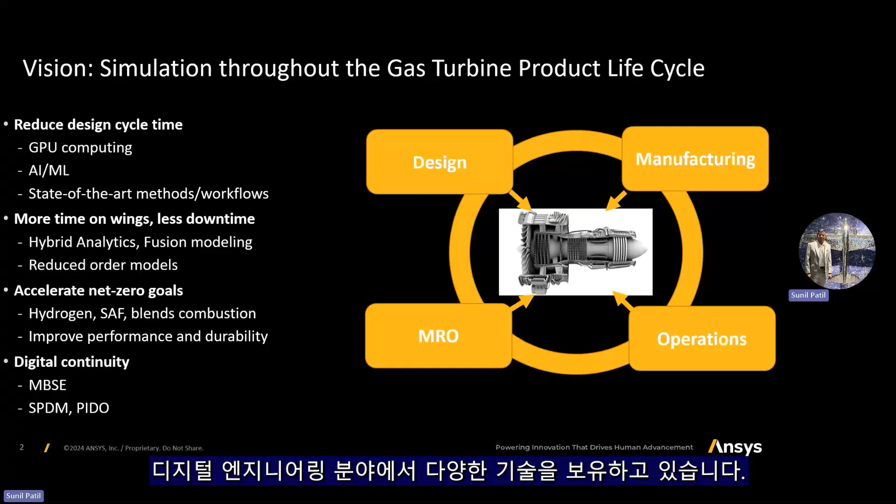As far as the gas turbine technology focus areas are concerned, we focus on various important components such as fans, but also on modules such as compressor, combustor, turbines, and also subsystems and the overall system, ensuring that key technology initiatives such as increasing efficiency, improving durability, reducing weight are addressed while also meeting new sustainability or net zero targets.

All of this is done while leveraging AI/ML and GPU-based computations as a method to really accelerate the cycle time and hence help our customers achieve faster time to market.

As I mentioned earlier, we provide solutions for individual components such as fan and things like blade flutter, bird strike, icing, to multi-stage aero unsteady combustion, modal analysis, rotor dynamic analysis, structural integrity analysis.

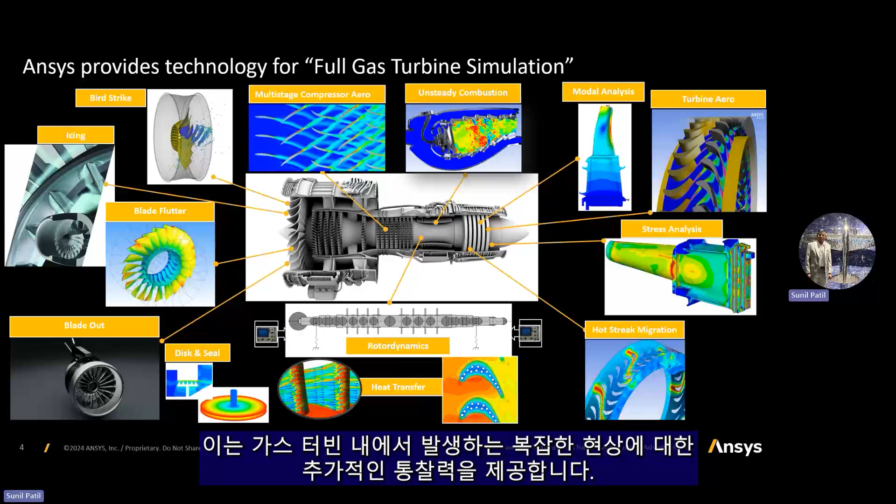One of the key differentiators from the Ansys side is you can also look at the full gas turbine end to end in a single calculation, and we have done that multiple times - in a single calculation you can go from the inlet to exhaust, and that provides additional insights into the complex phenomena happening within the gas turbines.

Now I'll briefly talk about the key pillars of our innovation strategy, which are also the important pillars for our gas turbine strategy I mentioned earlier. On the far left, you would notice our continuous focus on core physics, numerical methods, and models.

We continue to focus on high performance computing. Over the years we focused on CPU-based computations, but we also continue to focus now on coming up with native GPU-based solvers, and also looking further in the future to leverage technologies like quantum computing and see how it can benefit simulations.

AI/ML has been another focus area for us, and we are leveraging that for software acceleration and overall accelerating the solution time and reducing the product design lifecycle time.

We also want to ensure that our products can be run equally easily on the cloud platform, just as they can be run easily on the edge or on the local workstation.

And as I mentioned earlier, we have several technologies in the digital field, which are clubbed here in this intelligent engineering pillar, such as MBSE, the simulation process and data management, digital twins, mission engineering, and so on.

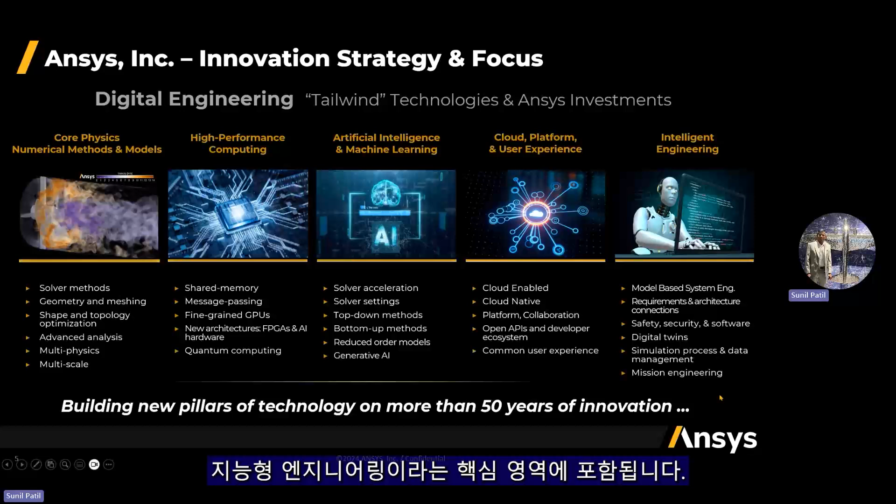Now with that background, let me deep dive into some of the key aspects of our gas turbine solution. We have a significant focus, especially on the CFD side, for native GPU computations.

Just to provide a little background, if you look at this chart at the bottom, you would notice that even the CPU-based computation, we have made enhancements over the past more than decade to make the calculations on CPU hardware fast.

But we introduced a native GPU solver 2 years ago, and you can see a significant increase in speed up, such as a high-end GPU card like H100 being about 10 times faster than running on 100 CPU cores.

Our overall strategy of leveraging GPUs natively is really providing a faster turnaround time. It is also providing much lower energy consumption to get a solution, and it is providing overall cost savings, including hardware cost savings.

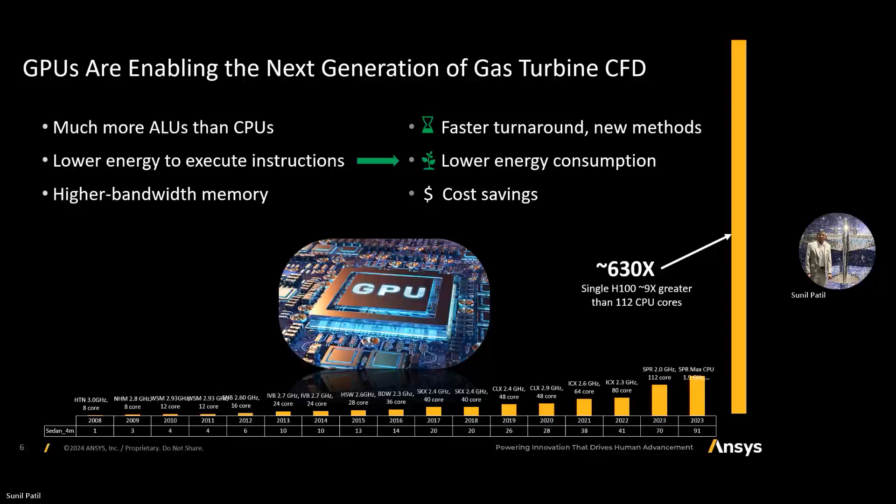As I mentioned, we introduced this native GPU solver for CFD in 2022, and we've had several releases since. By the latest release, we now have all the fundamental capabilities as well as some advanced capabilities which can address a lot of the complex problems for gas turbines, including gas turbine combustion, turbo machinery aspects, and many steady and unsteady phenomena happening inside the gas turbine. I'm going to cover some examples in the next few slides.

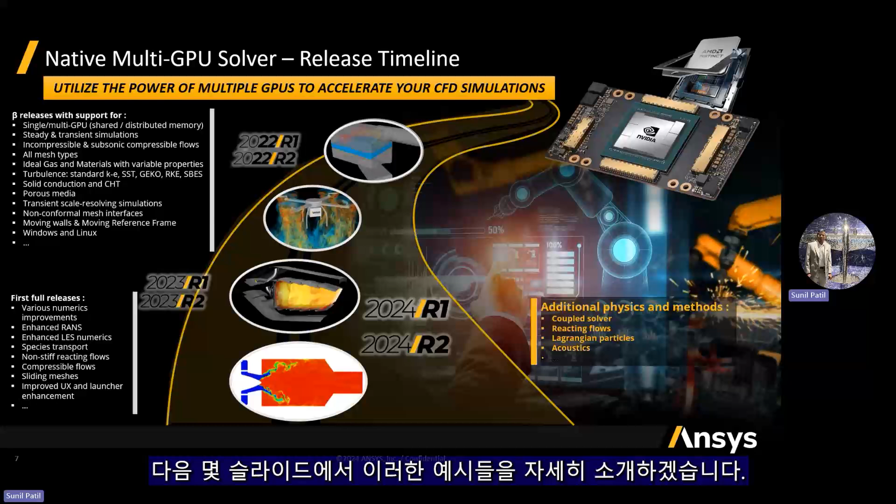I also wanted to mention that our GPU solver really scales well, and it can also leverage different hardware. In past couple of years, we published a lot of benchmarks on NVIDIA hardware. This year, 2024, we officially started supporting AMD hardware as well.

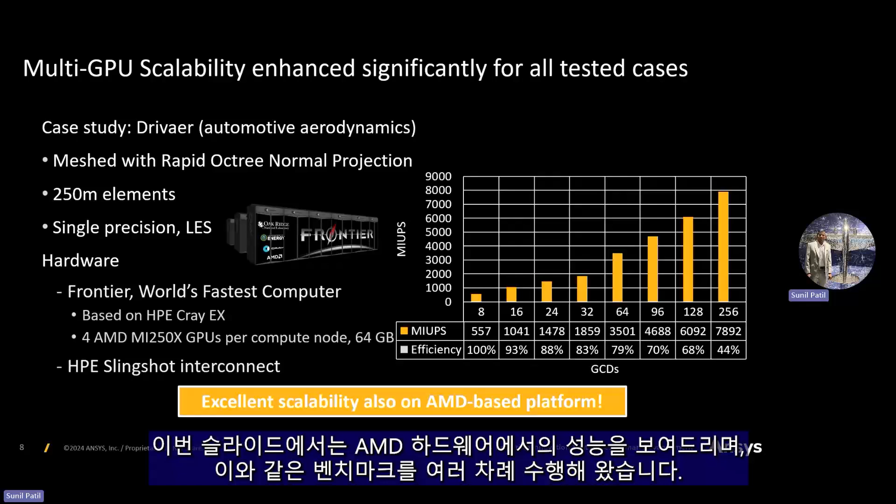Here you'll see one of the benchmarks on the 250 million LES case. You would notice that even on the AMD hardware, we do a really good performance scaling, parallel scaling. The key point I wanted to mention here is that the native GPU solver provides all those significant benefits, which I mentioned in the previous slide, on all different kinds of hardware. We've shown on NVIDIA, and here I'm showing on AMD, and we have done several such benchmarks. If there is interest, please let us know.

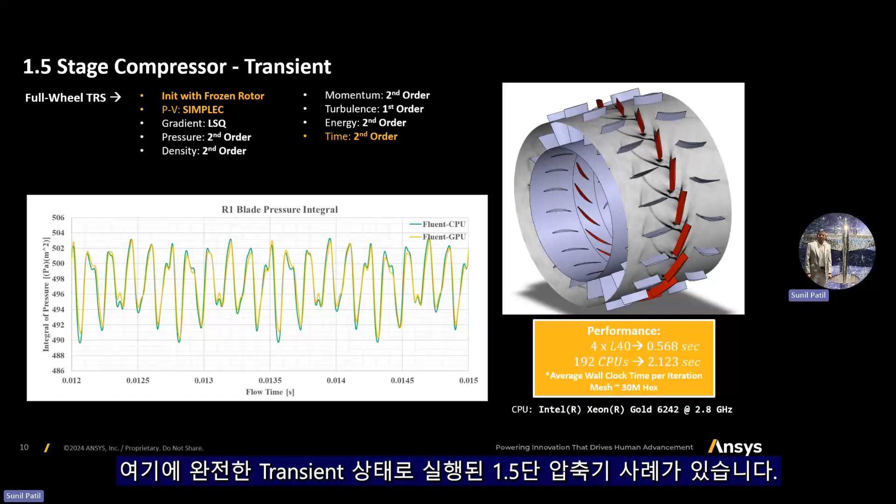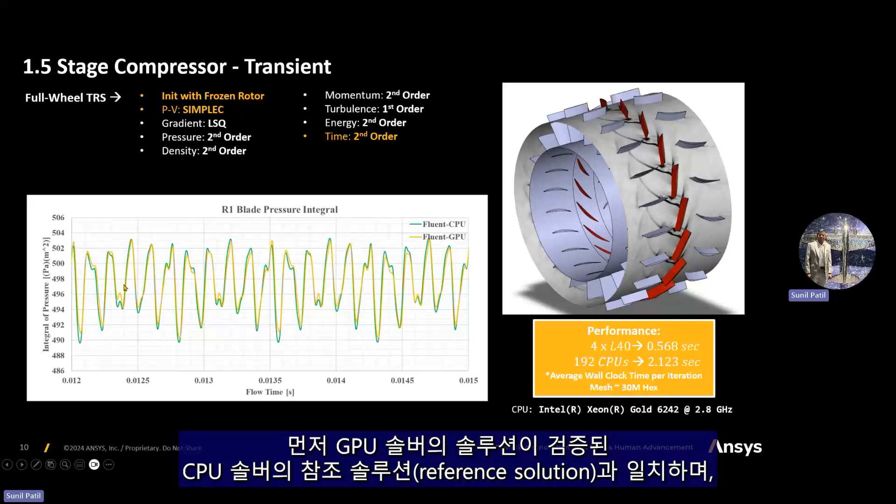Also cover a few of the turbo machinery examples here. The first one is a 1.5 stage compressor, run fully transient, full wheel, and this is a transonic compressor. Here's some of the details on the way we ran this case. You would notice that the solution from the GPU solver matches with the reference solution from the validated CPU solver, and once we do that, we see a significant performance benefit by running on GPU.

Here, we actually use a lower-end GPU card, L40, and even on that card, just one quad L40 node, we are able to get a solution for this 1.5 stage full 360 unsteady sliding mesh case which was taking just about half a second for a given time step, which provides significant speed up compared to running on CPUs.

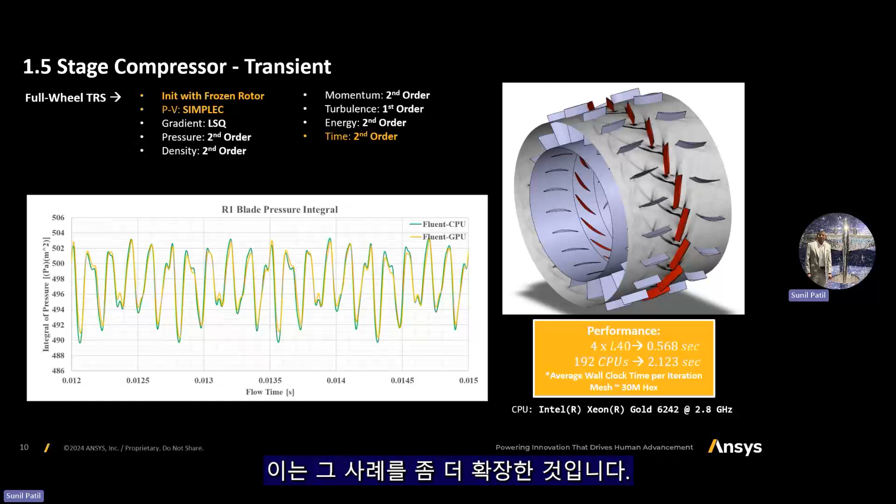This is a further extension of that - a 2.5 stage compressor. Again, you would notice that the solution from the GPU solver overlays on the CPU solution in terms of the signal, in terms of the frequency spectra. This is a little bit bigger case, about 100 million hex elements, and we can still run on a higher number of lower end GPU cards and still get a solution in less than a second per time step for this full wheel unsteady sliding mesh case.

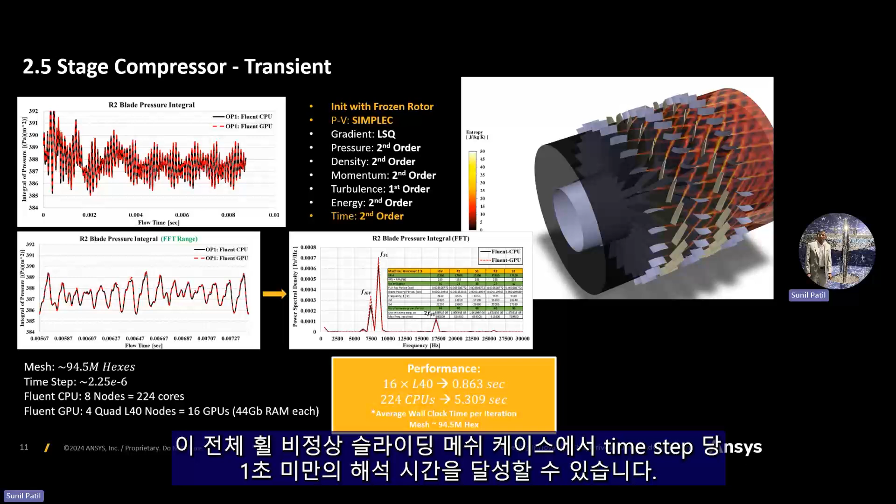This is just to highlight the strength of the fully native implementation to really take advantage of the GPU hardware. This is a 3.5 stage high pressure compressor of an aero engine. We ran this full multi-stage, full wheel - about 500 million total cell count. We ran this case with LES simulation, and we're able to run the full wheel or full revolution of this full multi-stage compressor in just about 8 hours on 3 GPU nodes. That provides the strength of native GPU solver to run these high fidelity transient calculations much more faster, making it much more practical, much more applicable in the regular production environment.

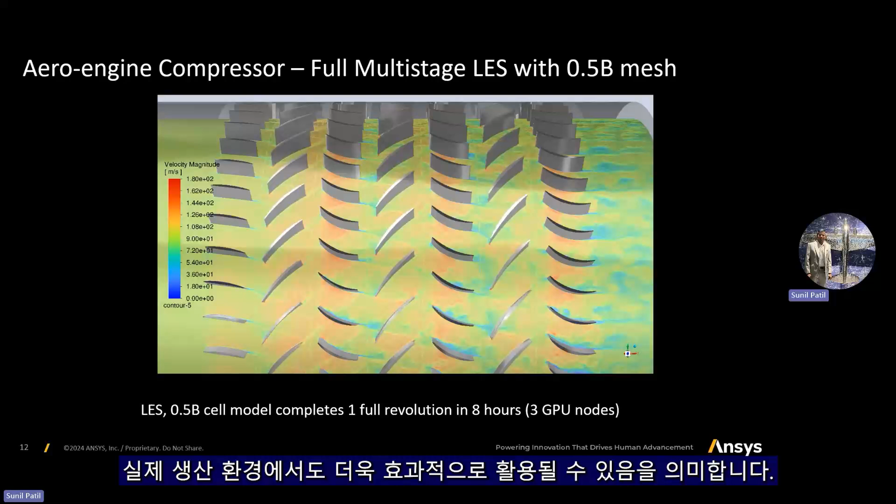Now I'll move on to the other important pillar, AI/ML, and with Ansys AI, we are providing a solution to really accelerate the design cycle time.

We have 3 different offerings under Ansys AI. Ansys GPT is basically a virtual assistant to Ansys products - a natural language, large language model assistant for documentation and training for your day-to-day usage of our software. Ansys AI Plus is primarily an AI add-on to different Ansys flagship solvers across our portfolio.

And Ansys SimAI is a machine learning platform for simulation across the physics. It's extremely fast and reliable, provides reliable physics predictions, which this AI model learns from your existing data and provides solutions to the new geometries in a matter of seconds.

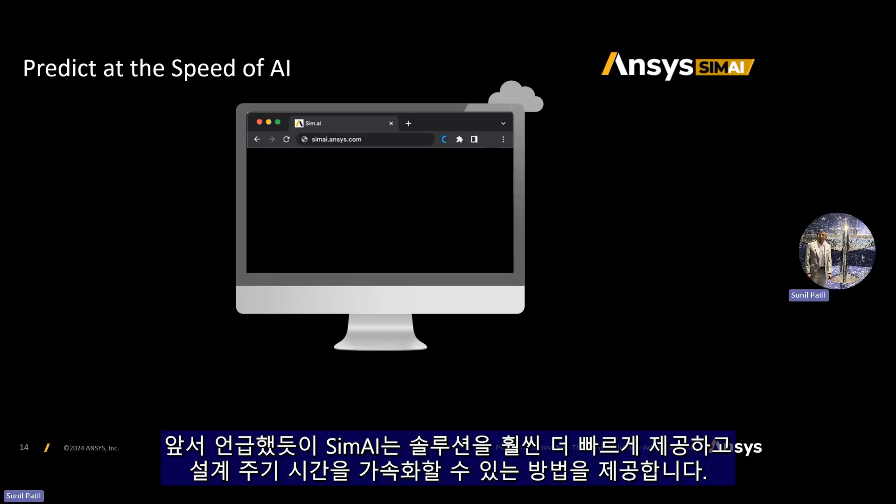So let me explain a little bit more details about SimAI, which, as I mentioned, really meant to provide the solution significantly faster and to really provide a way to substantially accelerate the cycle time. The idea is to use a machine learning platform to use the existing data.

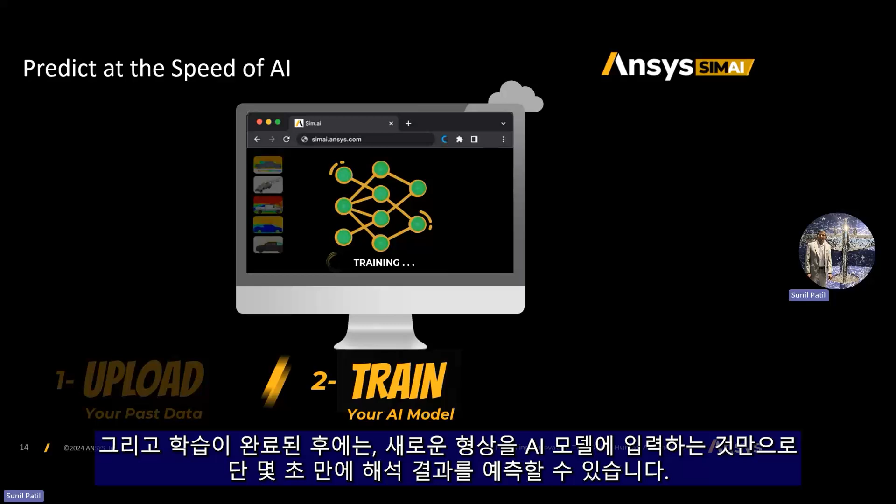So you can upload your past or newly generated data to this platform, and that data is used to train the AI model. And once this AI model is trained, then you can pass the new design, new geometry to this AI model, and it will start predicting in a matter of seconds.

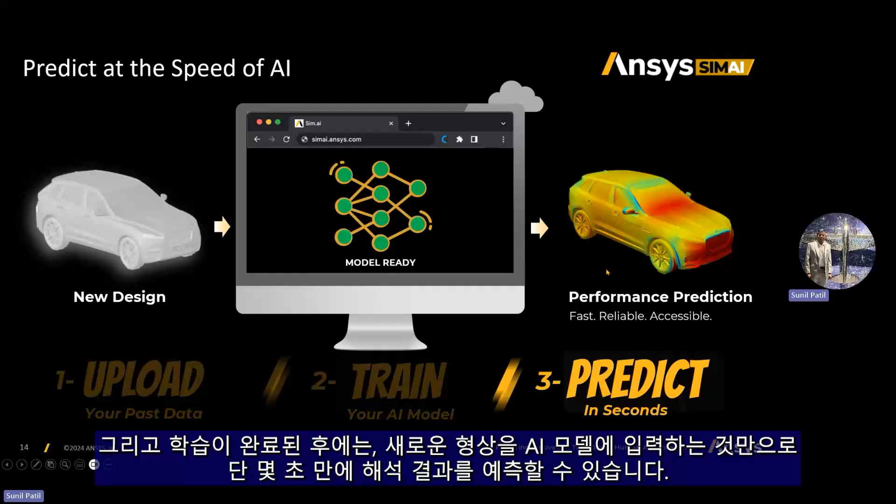So you can really unleash the power of AI for gas turbine design with Ansys SimAI. It's a cloud-based machine learning platform for simulation where you can train the AI without having to parameterize your geometry. You can predict the performance across the design changes.

You can leverage previously generated data to train the model. You can always generate new data and continuously keep on training the model, so it can continue to evolve.

And on top of that, Ansys SimAI is physics neutral. It's applicable to any physics such as fluids or aero, mechanical, electromagnetics, optics - applicable across all different industries such as aerospace, energy, automotive. It works with any 3D simulation data, whether it is Ansys generated data or generated by your in-house solver or third-party tools.

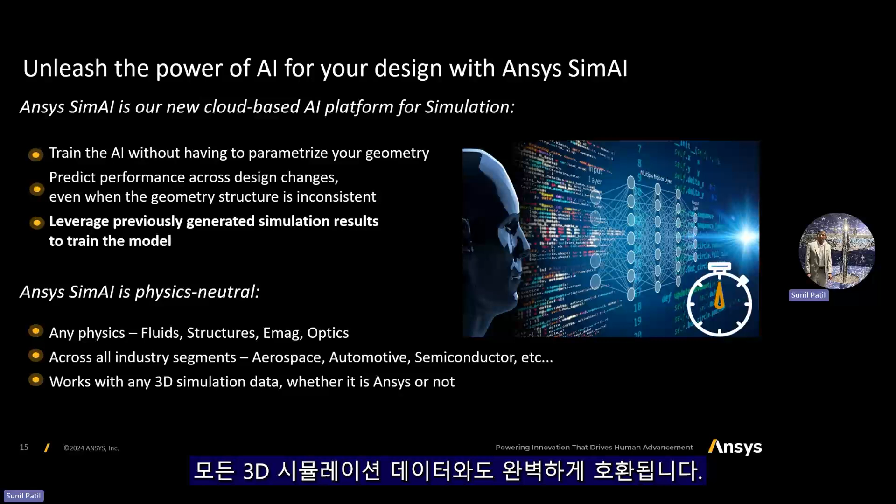And here I'm presenting the generative AI case using SimAI for the gas turbine compressor airfoil design. I'm presenting the airfoil design or the blade design because that's one of the areas where a lot of time is spent within the design phase for the gas turbines.

Here what we did was we used the existing aero as well as structural data. We used about 150 simulations - CFD and different modal structural simulations - to train the SimAI model. And once that SimAI model was trained,

we're providing new designs to the SimAI through a data generation engine, which generated different designs with the use of optiSLang, and it was able to predict the performance, predict the results for those new designs

in a matter of seconds. You can see this is one outcome for the CFD results and the predictions from SimAI - as you can see for the pressure distribution in this case, it matches very well if you actually run a CFD calculation for that new design.

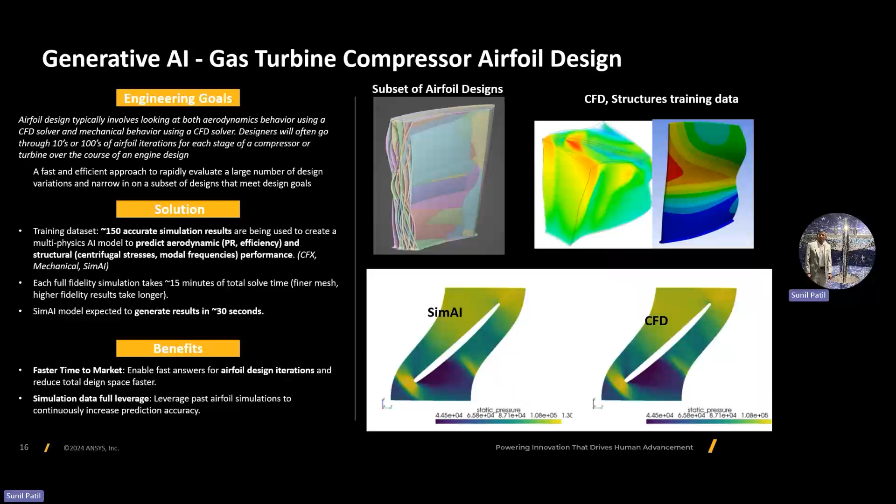So I talked quite a lot about SimAI, but also AI Plus, which is basically AI ML technologies embedded in our solver, also provides significant advantage for our gas turbine customers. I'll cover a couple of examples here, one on the aero side and one on the mechanical side.

This one is on the aero side or CFD side. The turbulence model optimizer in Ansys Fluent is part of the AI Plus offering. So the AI technology along with adjoint is used basically to calibrate the RANS-based GEKO turbulence model coefficients using the training data coming from high fidelity LES simulations.

And that really makes that two-equation GEKO turbulence model applicable to a similar class of problems with increased fidelity because it's leveraging the training from the high fidelity LES calculations. So such Turbulence Model Optimizer is now available as part of the AI Plus offering.

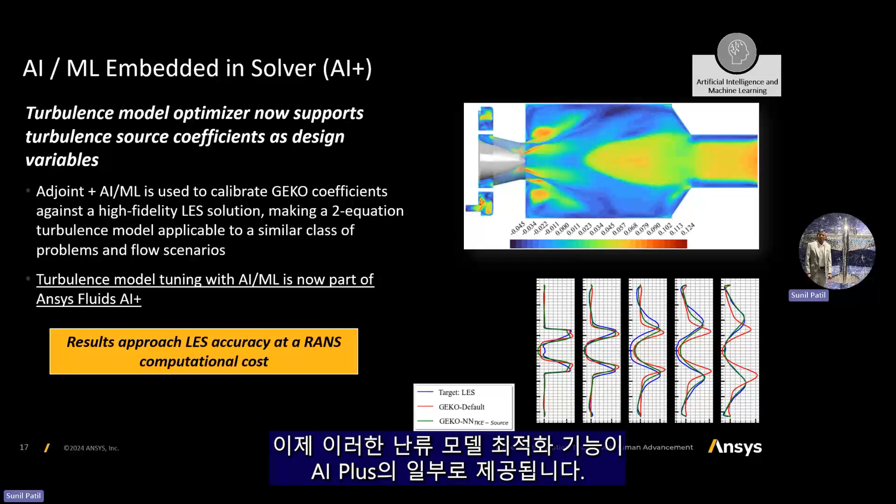On the mechanical side, we have been leveraging the solution statistics from millions of solver runs, anonymized, for resource prediction, including the solver choice, speed, memory, and the required disk space. And that is a powerful tool for our mechanical users for various classes of problems related to structural analysis for gas turbines.

Now I'll cover some specific areas related to turbomachinery or the blade rows. And I wanted to mention here that we continue to focus on CFX for the turbomachinery capabilities.

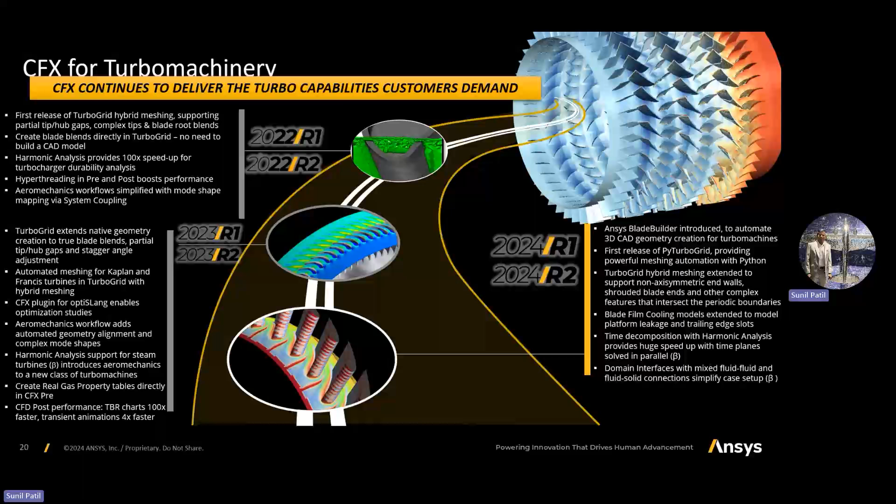In this chart, you will see that in the past couple of years, there were a lot of enhancements done in CFX, driven directly from our gas turbine customers, all the way from end-to-end workflows to detailed capabilities related to film cooling and the harmonic balance method. In fact, this year we are introducing a completely new paradigm for harmonic balance method with the time decomposition harmonic balance approach. Significant enhancements have been done in just the past couple of years, and we continue to deliver on the turbo capabilities based on customer demand.

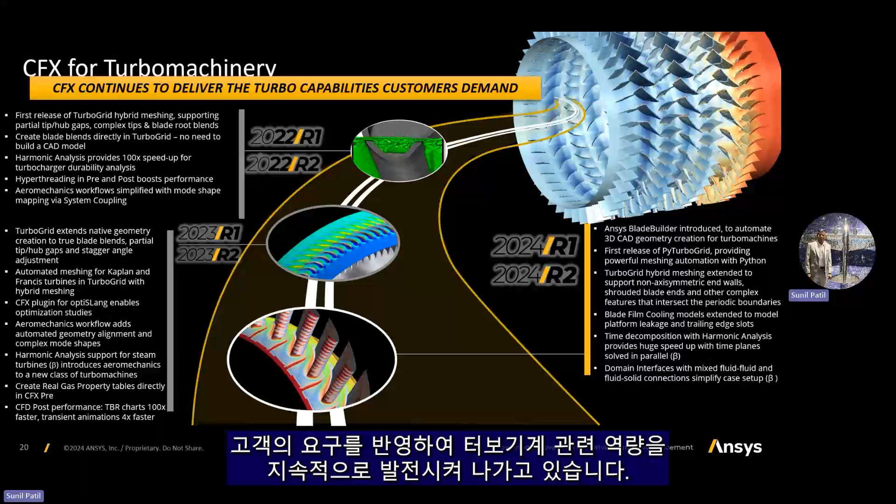Here you will also see some of the pre and post-processing focus associated with the overall turbomachinery solutions. We introduced the Blade Builder product, which provides a very streamlined workflow going from your mean line design or preliminary design to the blade row meshing to the CFD analysis.

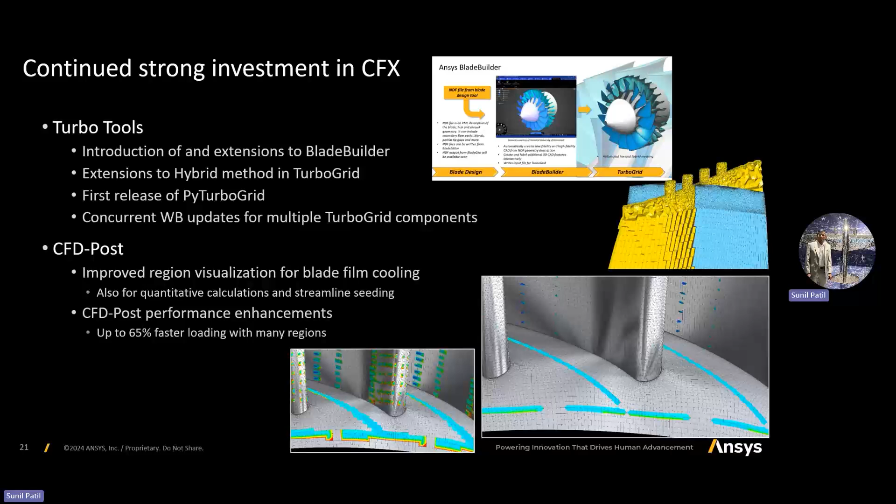We also introduced hybrid meshing in the past few releases and continue to build upon it in TurboGrid. This year, we also had the first release of PyTurboGrid, which allows a Pythonic framework to be used for automating the meshing as well as further enhancing overall capabilities, including the ability to do meshing for multiple components simultaneously, and also several post-processing enhancements related to visualizations or overall performance improvement to get results faster or post-process results faster.

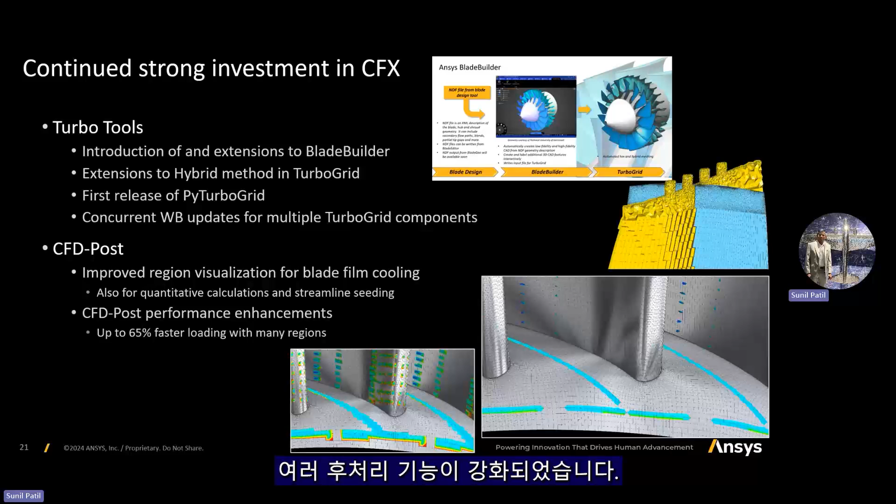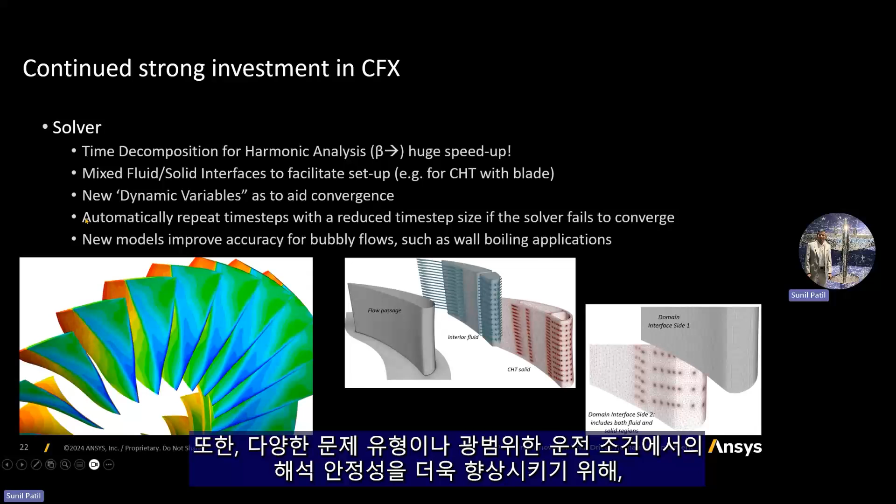On the CFX solver side, as I mentioned, this year we also introduced the first-of-a-kind time decomposition harmonic balance method, which provides an order of magnitude speed up. We also introduced mixed fluid-solid interfaces to facilitate better setup of high pressure turbine blades, and new dynamic variables to aid convergence. There are now capabilities to automatically repeat the time step with a reduced time step to improve overall robustness for various classes of problems or solutions across a wide range of operating conditions, and several new models to improve accuracy for flows like bubbly flows and wall boiling applications, and so on.

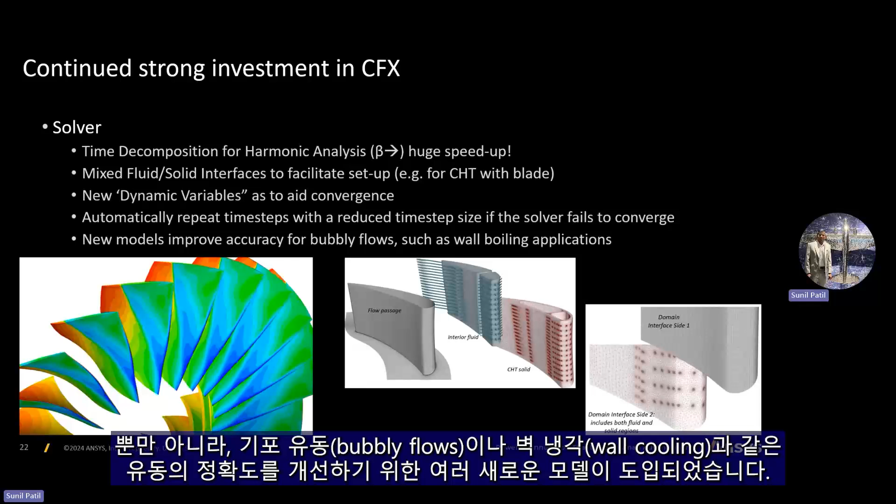I didn't mention about the Blade Builder, which is a new product, and it sits inside Ansys Discovery. It provides a modern 3D CAD environment for turbomachinery. The idea is you can bring in the data from your blade design tool, or just the data from your mean line design tool, and we can help you create the 3D CAD from that data.

We also help you further modify that data. For example, if you want to add complex details like a complex fillet, squealer tip, or partial tip gap, you can easily create those features and pass all that information automatically so that TurboGrid can create a hybrid mesh in a much more automated manner. So this Ansys Blade Builder provides a streamlined workflow going from mean line design to CFD, but it also provides this modern 3D CAD geometry environment for turbomachinery.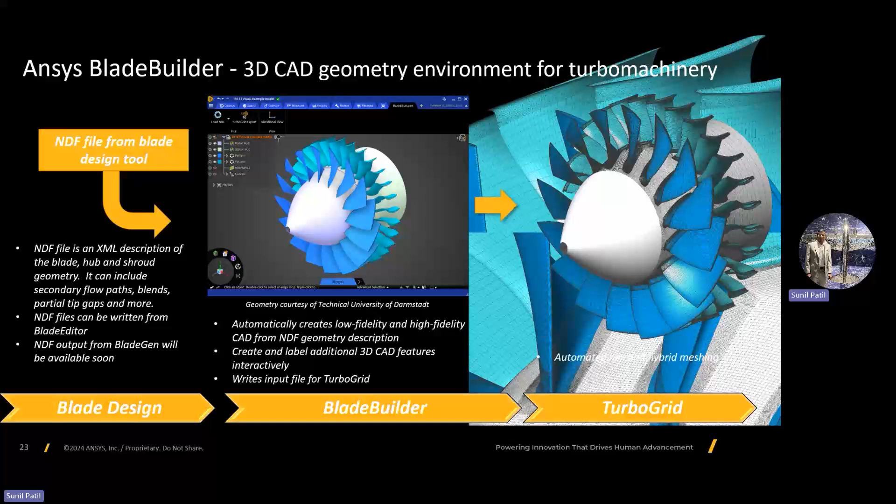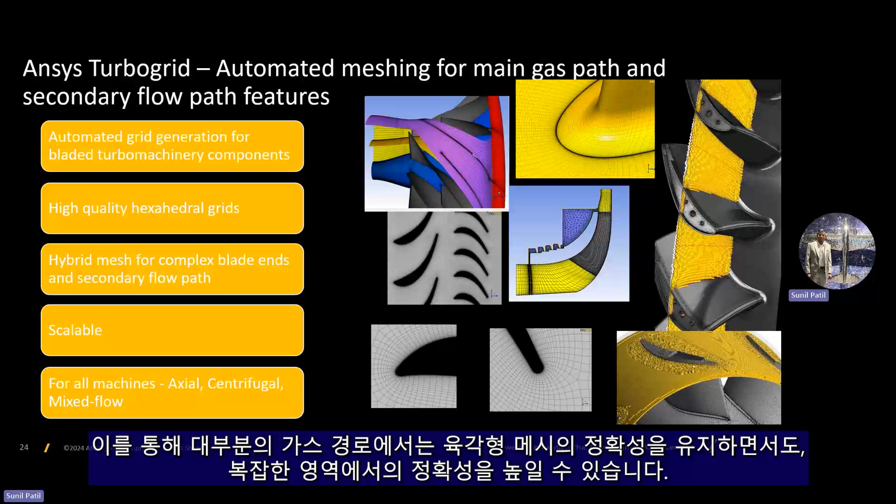I did mention about Ansys TurboGrid. Many of you might be familiar that it provides an automated way to create a hex mesh for the main gas path. But in the past 4 to 5 years, we introduced and built upon hybrid meshing, which can handle complex details such as squealer tips and secondary flow paths. The idea is to still have mostly hex mesh in the main gas path. Only in regions of complexity do you choose to have unstructured or tet mesh, but with a proper one-to-one connection to the main gas path hex mesh. That really provides the benefit of having overall low cell count, but still a really good quality mesh, which provides a much more accurate solution while maintaining the accuracy of mostly hex mesh in the main gas path.

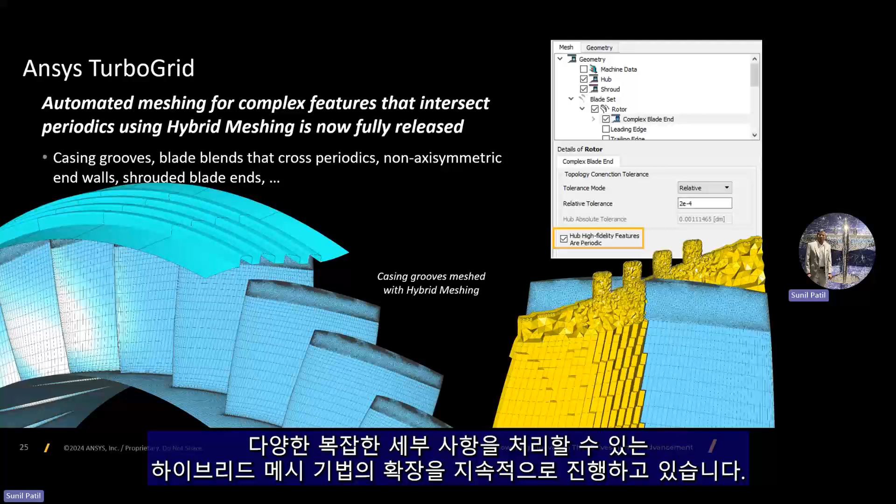As I mentioned, we continue to expand this hybrid meshing capability for various complex details such as casing grooves, complex blade ends, non-axisymmetric end walls, shrouded blade ends, and so on.

We also continue to provide solver APIs, ensuring that the broader Pythonic ecosystem can be leveraged for various different needs, whether it's customization of your workflows, automation, or adding additional capabilities. So we introduced PyFluent in 2022. We released PyTurboGrid this year, as I mentioned, which provides automation as well as the ability to do multi-stage meshing. We are also working on introducing PyCFX and PyRocky very soon.

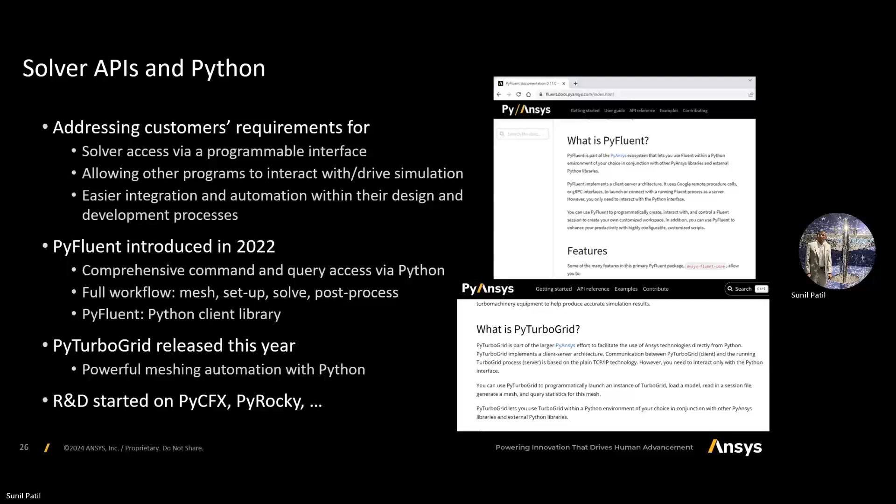Here is an example of PyTurboGrid, which can be leveraged to fully automate the meshing process for bladed components. In this example, this is a 4.5 stage compressor, and we were able to mesh all these rows simultaneously using this PyTurboGrid script. We're able to create the mesh for this full compressor in less than 5 minutes using the PyTurboGrid environment. So it provides automation plus additional capabilities such as meshing multiple rows simultaneously.

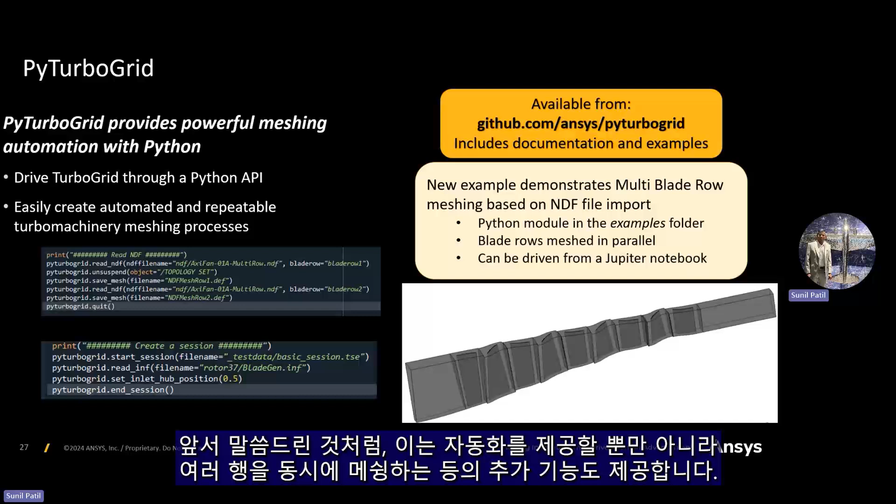So I talked significantly about our fluids roadmap, or CFD and aero roadmap. Now I'll move on to the mechanical roadmap.

We really have significant focus on overall gas turbine workflows for thermal analysis, such as mission and flight cycle analysis, structural analysis, and dynamic or explicit analysis. I'll cover some of the key areas and talk about different workflows for these key areas and how they're making this overall analysis faster and streamlined.

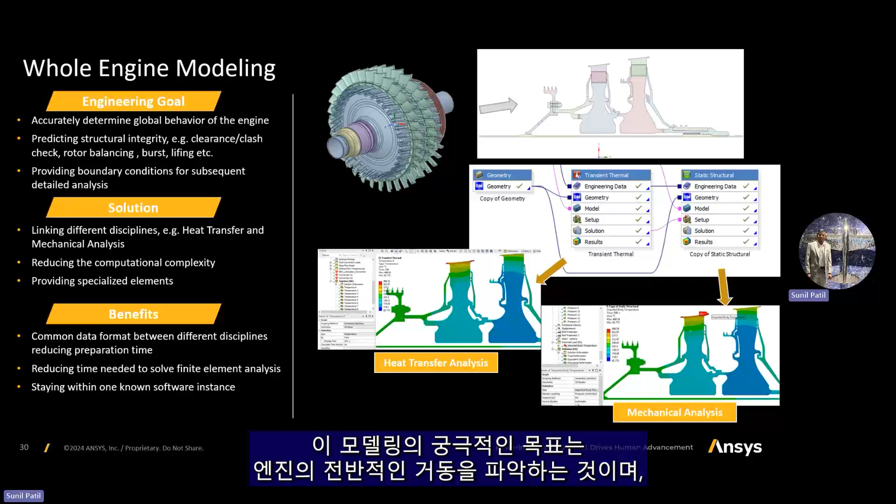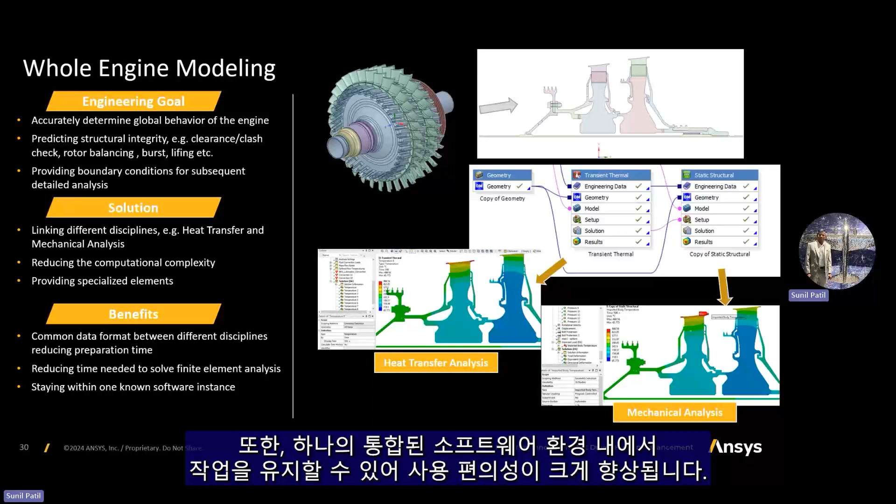I'll start with whole engine modeling, where the ultimate goal was to determine the global behavior of the engine while predicting things such as structural integrity, clearance or clash check, rotor balancing, etc., and also providing boundary conditions for subsequent detail analysis. Now we can link these different disciplines such as thermal and structural consistently. We can reduce computational complexity while building in best practices for this whole engine modeling while providing specialized elements, reducing the time needed to solve such finite element analysis, and making it easy to stay within one known software instance.

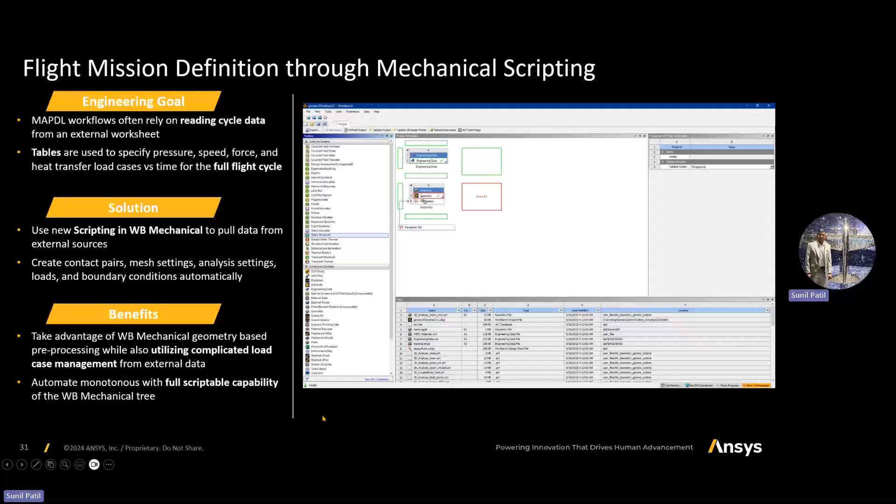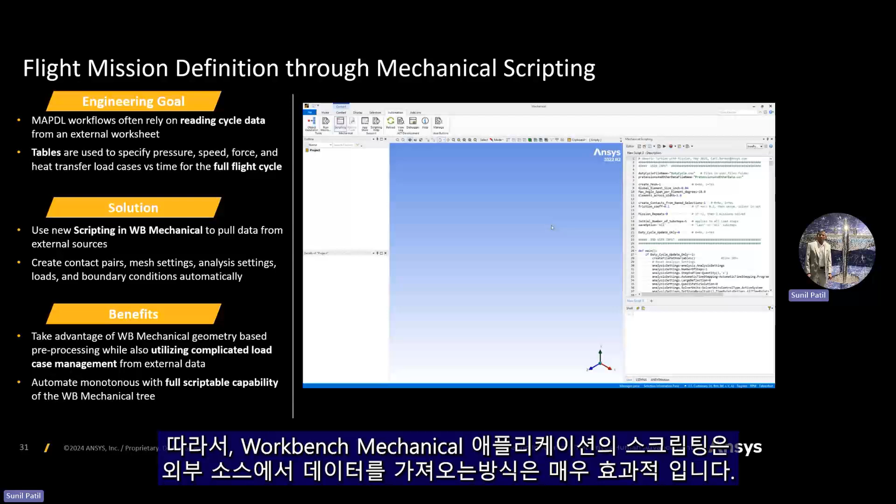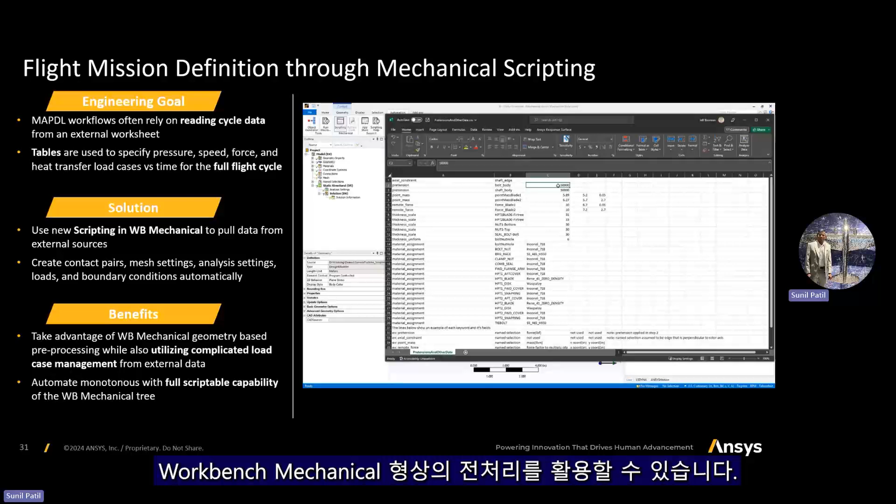The flight mission definition through mechanical scripting. The use of scripting in workbench mechanical to pull data from external sources can be effectively used, as you can see in this demonstration video, to create contact pairs, mesh settings, analysis settings, apply loads and boundary conditions automatically. You can take advantage of workbench mechanical geometry-based pre-processing while also utilizing complicated load case management from the external data utility, automating a lot of these repeating processes with full scriptable capability of the mechanical tree.

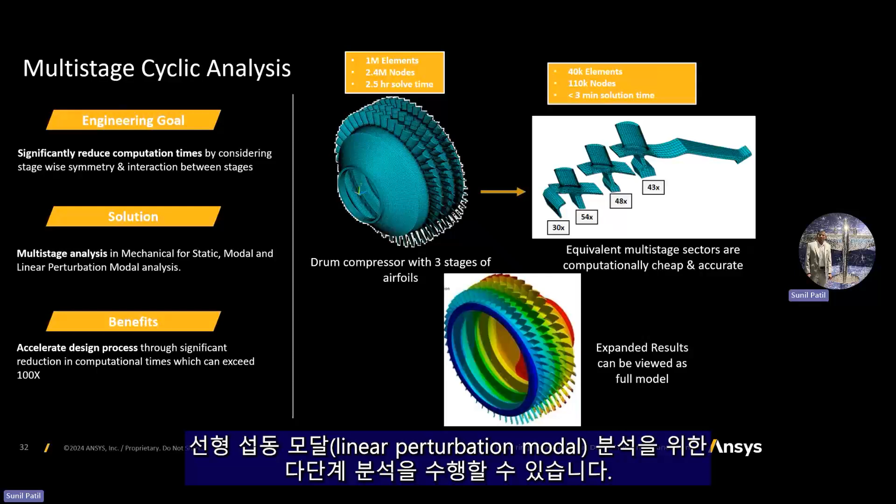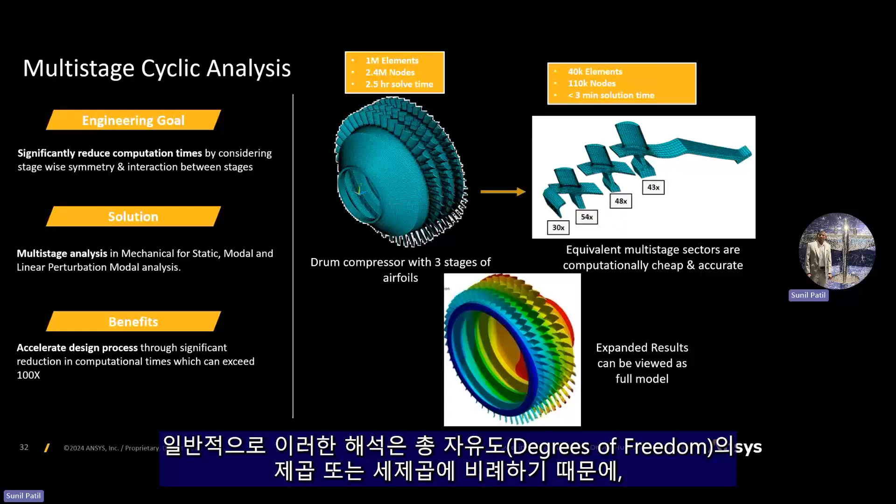We also introduced multi-stage cyclic symmetry a few releases back, which helps with the engineering goal of significantly reducing computational time for things like modal analysis. You can now do multi-stage analysis in mechanical for static, modal, and linear perturbation modal analysis. Previously for such analysis, one needed to do a full 360 analysis, but now you can just model a single sector per row, which accelerates the design process significantly, typically more than 100 times faster, because such analysis is proportional to the power of 2 or 3 of the total number of degrees of freedom. You're substantially reducing the degrees of freedom, as you can see comparing a full wheel solution with million elements to just 40K elements, and you see dramatic reduction in solution time going from several hours to less than 3 minutes.

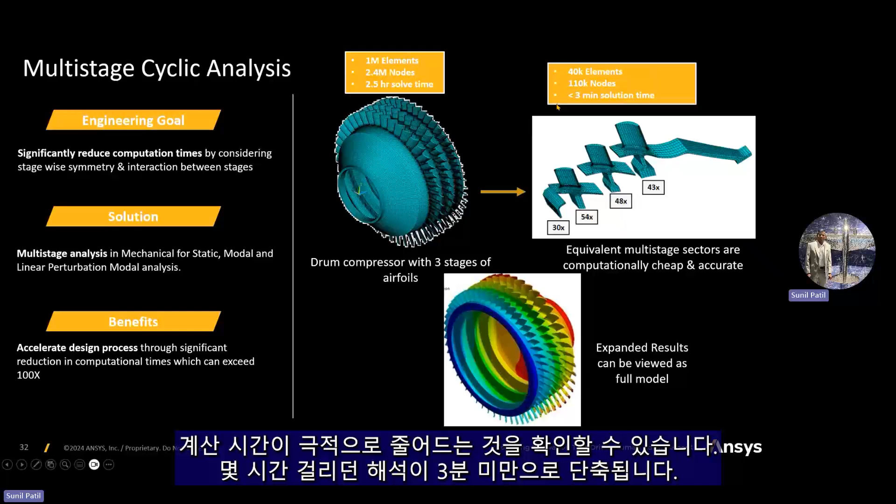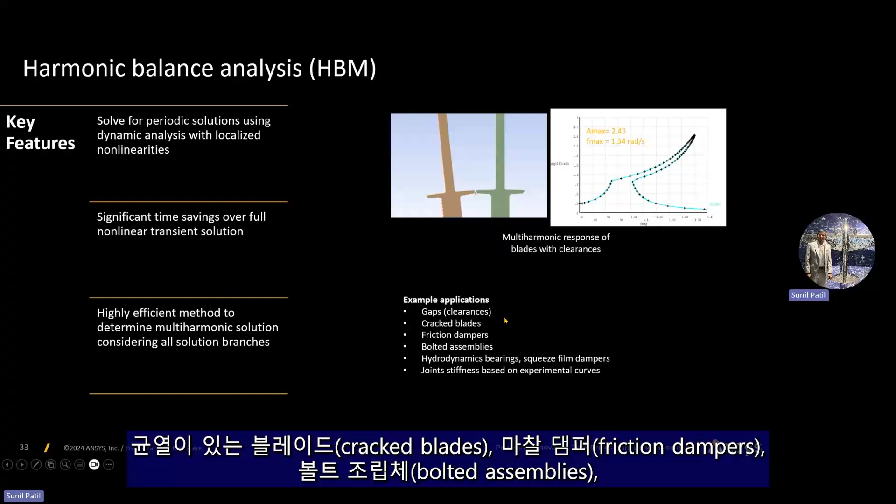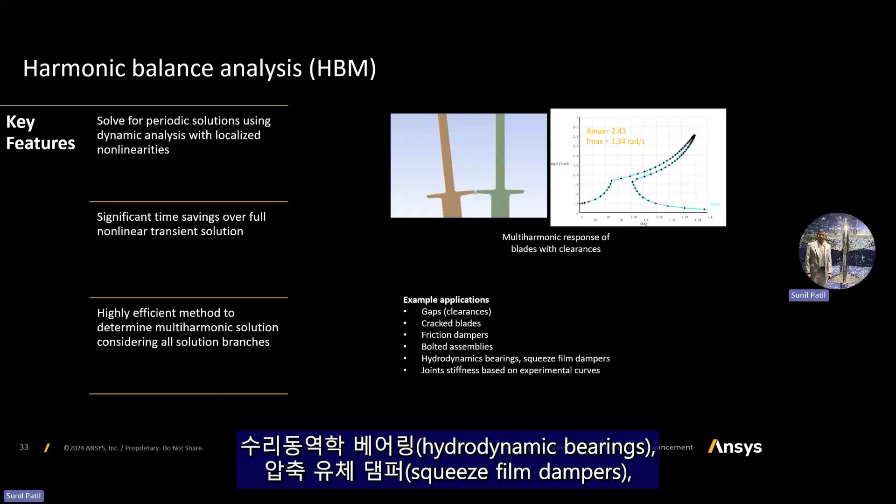We also introduced the harmonic balance approach for mechanical this year. The advantage here is you can get significant time savings compared to the full nonlinear transient solution. You can solve for periodic solutions using dynamic analysis where you can still account for localized nonlinearities. Such applications involve different gaps or clearances, cracked blades, friction dampers, bolted assemblies, hydrodynamic bearings, squeeze film dampers, joint stiffness based on experimental curves—all these different applications where you can make use of the harmonic balance approach. Now at release 2024 R2, the harmonic balance method is also applicable to cyclic symmetry, which makes it much more advantageous for turbomachinery problems.

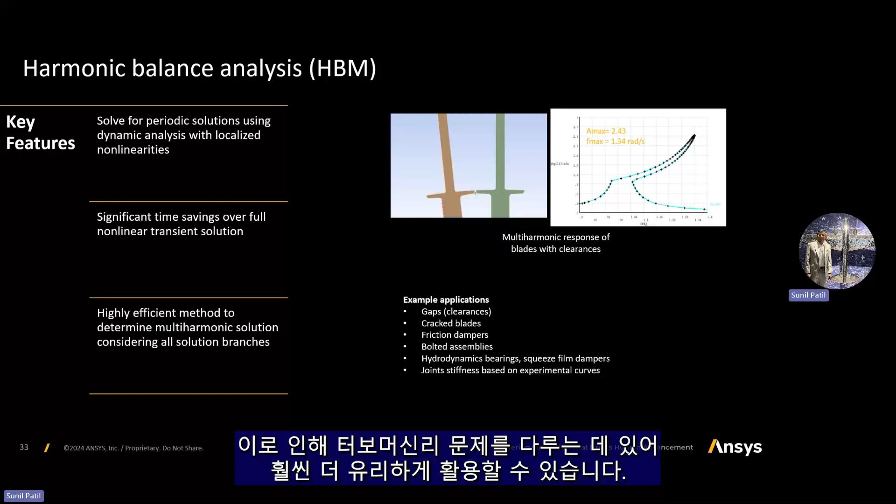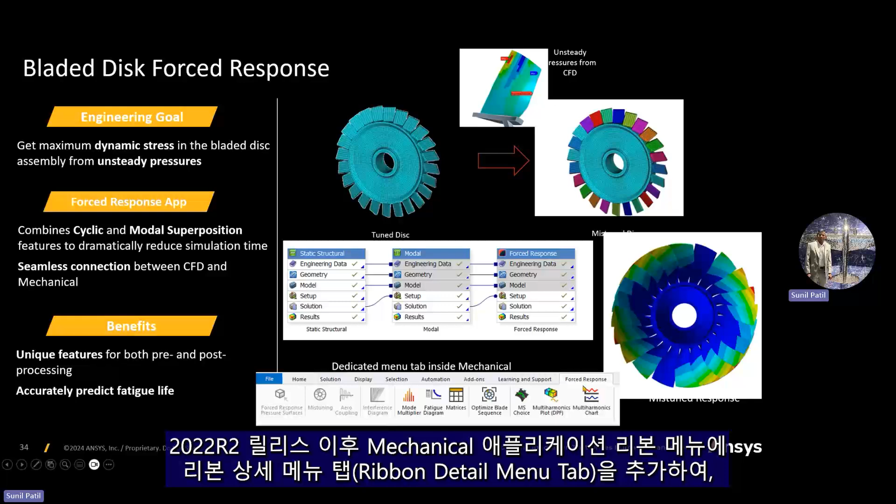The bladed disk response or forced response analysis has been our focus for many years. Since release 2022 R2, we now provide a dedicated menu tab inside the mechanical application ribbon where we've automated a lot of the pre and post processing steps needed to carry out the forced response analysis—getting unsteady pressure data or engine order data from CFD, mapping that onto the mechanical mesh, the ability to get the interference diagram to look at crossings, an easier way to carry out mistuning or account for aero coupling, and a lot of turbo-specific post-processing, such as looking at the full expansion of results like displacement, mean stresses and strains, and getting the data for lifing analysis in the right format.

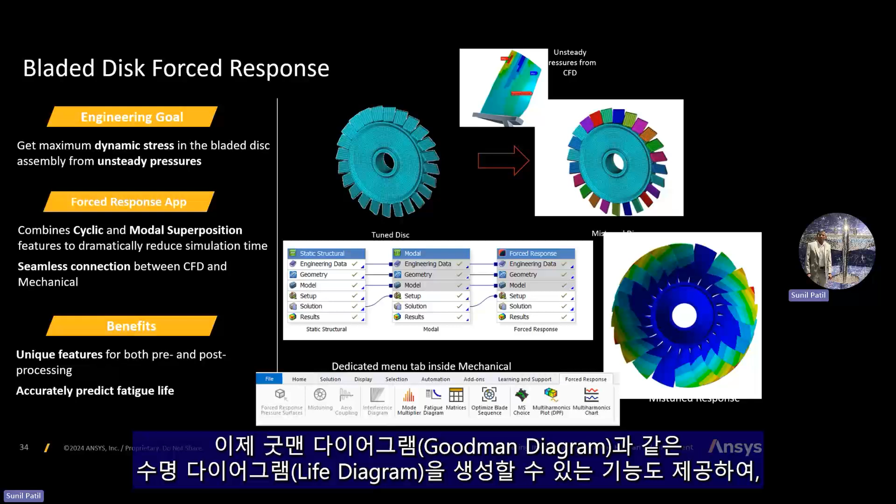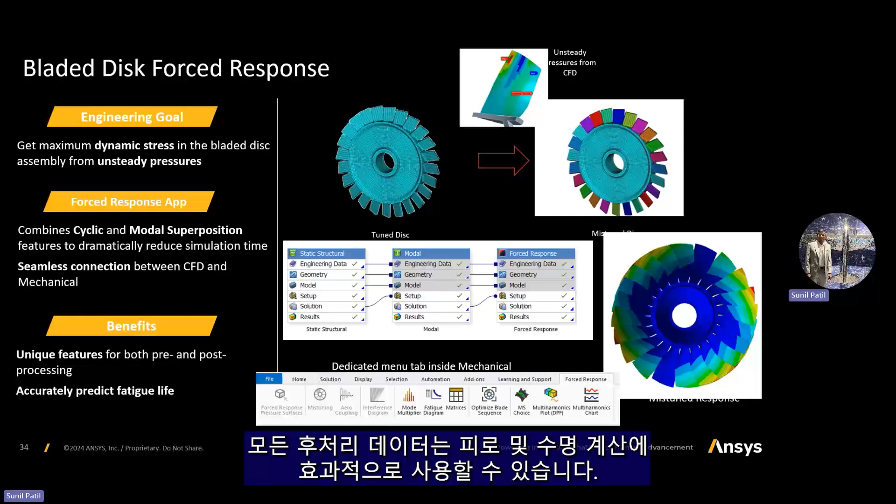We now provide the ability to create a lifing diagram such as a Goodman diagram, which gives a much better view, and all that post-process data can be used effectively for fatigue and lifing calculations.

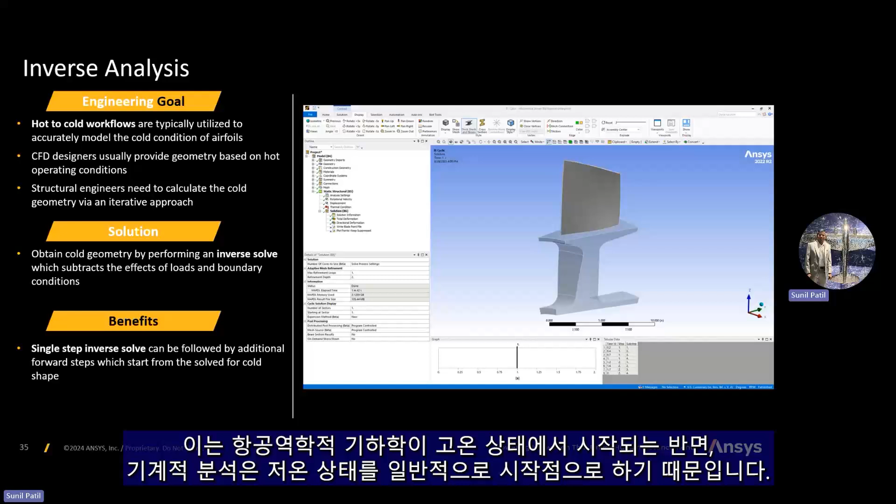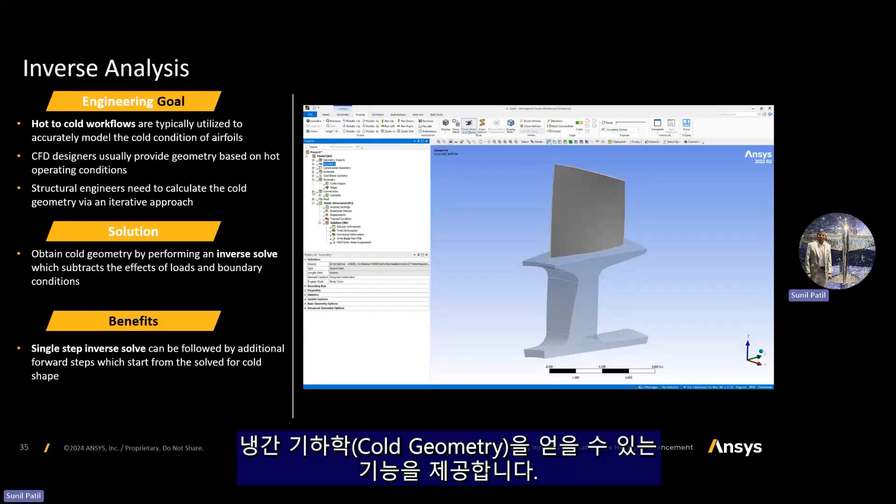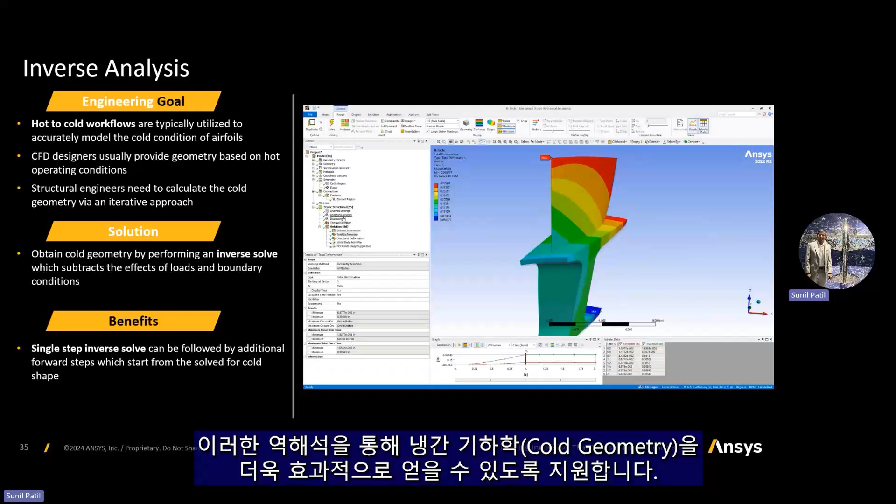Inverse analysis, especially hot-to-cold workflows, is important in gas turbines because aerogeometry is hot while the mechanical typical starting point is cold. We now provide within the Mechanical application a way to obtain the cold geometry by performing the inverse solve, which subtracts the effects of loads and boundary conditions. This, combined with some of our capabilities within SpaceClaim, Discovery, really allows you to obtain the cold geometry through this inverse analysis.

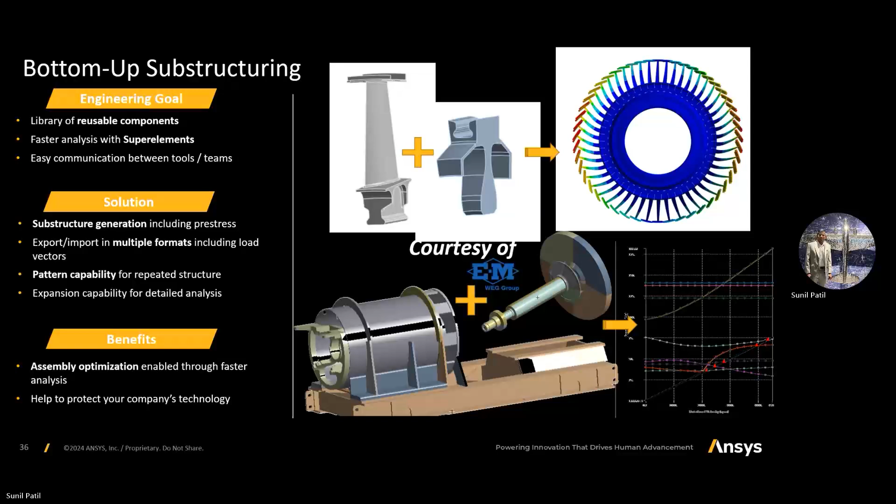Bottom-up substructuring is also another key area, with things such as substructure generation including pre-stress. We are now providing export/import of multiple formats, including load vectors, the ability to create patterns, and an expansion capability for detail analysis, which really helps for assembly optimization, enabled through faster analysis. It can also be used to help protect your company's IP.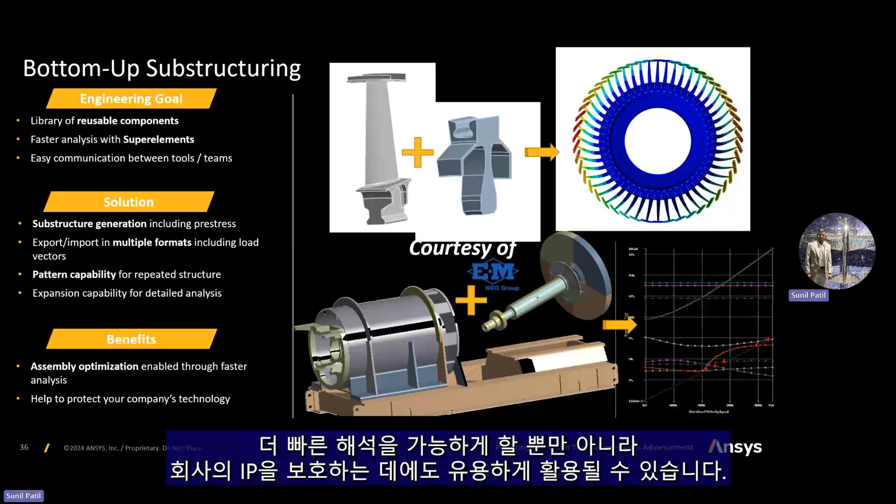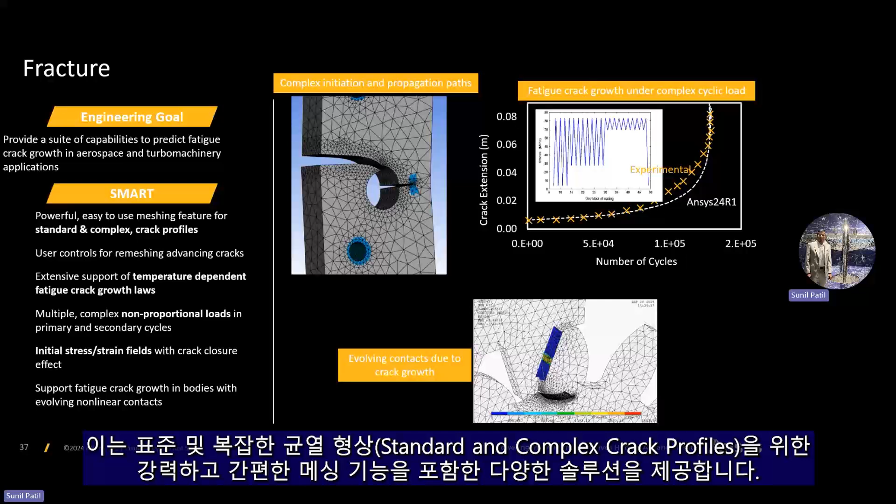Fracture is another key area, and we provide the solution in this space through our SMART solution, which is a powerful, easy way to use meshing features for standard and complex crack profiles. It provides user controls for remeshing advancing cracks. There's extensive support for temperature-dependent fatigue crack growth laws, initial stress-strain fields with crack closure effects, and support for fatigue crack growth in bodies with evolving nonlinear contacts. This SMART feature has really evolved over time and has all the fundamental and advanced capabilities which can be leveraged for fracture analysis in gas turbines.

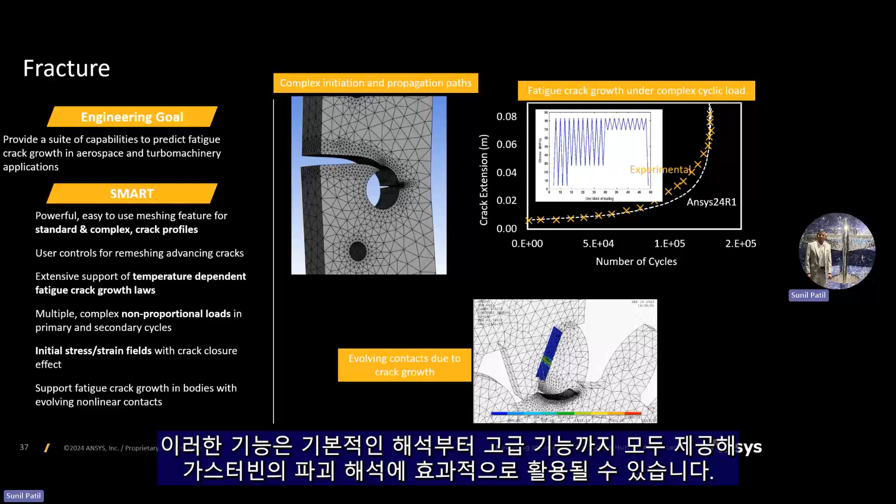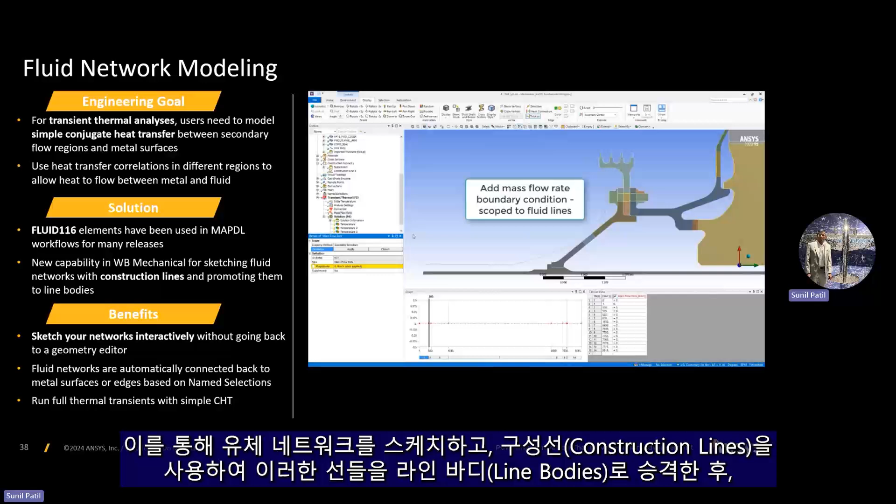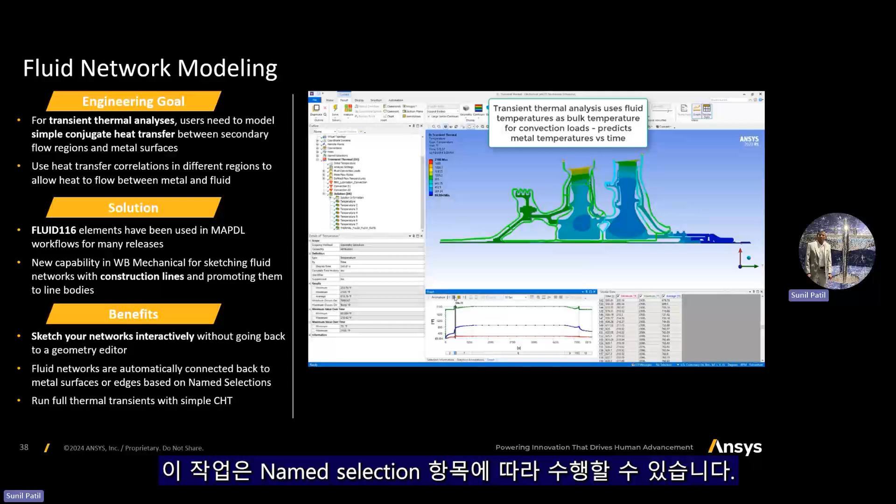Fluid network modeling is another important area, especially for carrying out transient thermal analysis, where you want a simple conjugate heat transfer analysis between the secondary flow paths and the metal surfaces. The Fluid116 element has been there for a while, but we now have this new capability in Workbench Mechanical for sketching fluid networks with construction lines, which we can promote to line bodies and project onto the right surfaces. So you can really sketch these networks interactively without going back to the geometry editor. These fluid networks are automatically connected back to the metal surfaces or edges, and can be done based on Named Selections for further automation, so you can eventually run the full thermal transient with simple CHT.

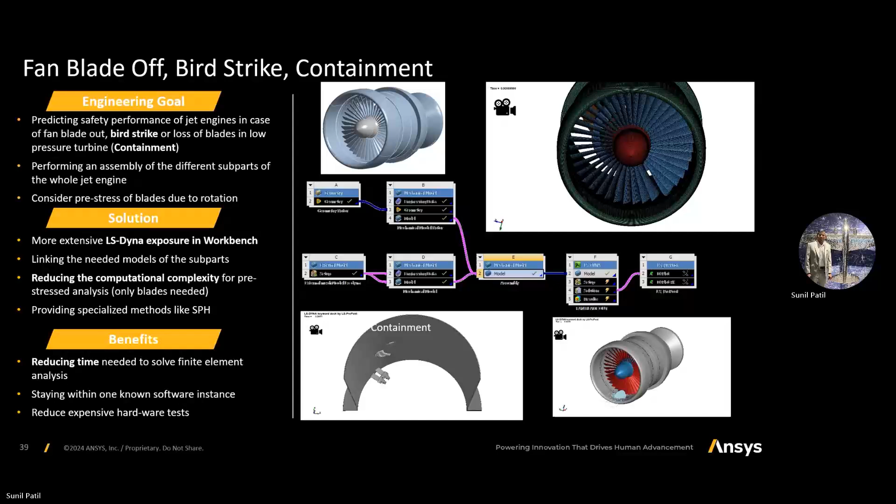For gas turbines, especially jet engines, phenomena such as bird strikes or foreign object damage and containment are important, and LS-DYNA is the gold standard for that. We've been doing more extensive LS-DYNA exposure in Workbench, providing linking of different models of subparts to carry out larger module-level or system-level analysis. It reduces the time needed to solve the overall finite element analysis, and you can stay within one known software instance and reduce the expensive hardware test.

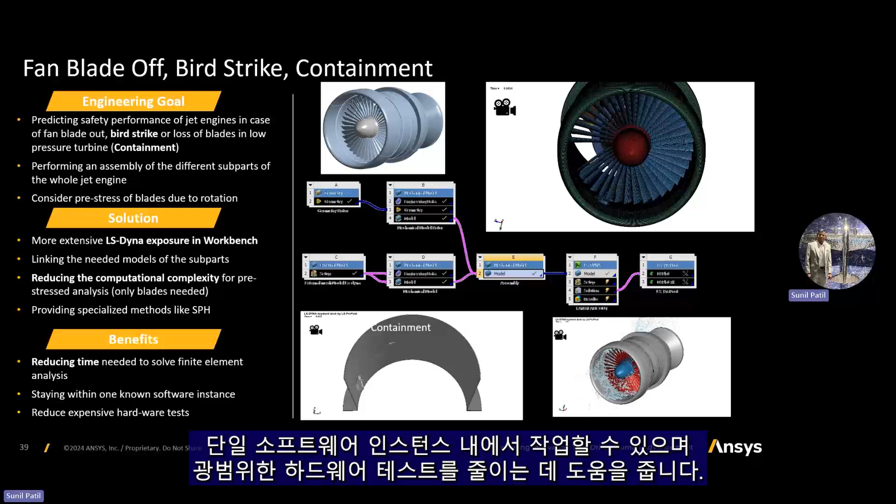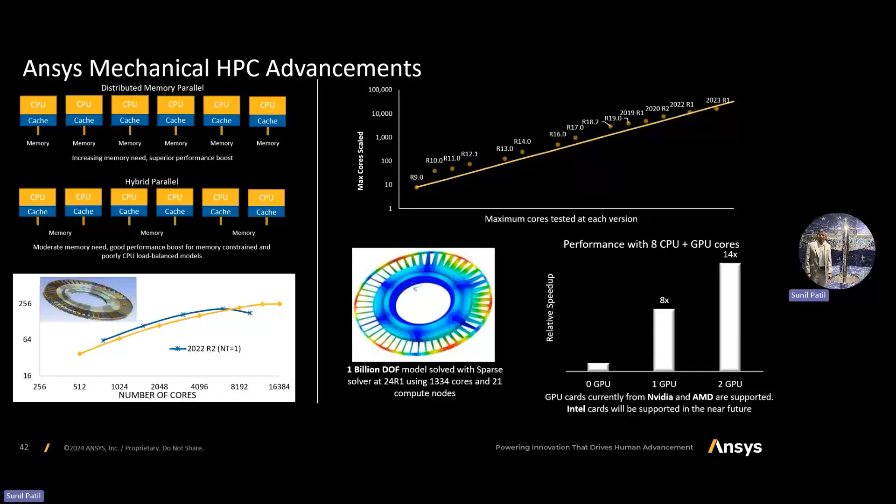Also on the performance side for Mechanical, one can leverage GPU computing through acceleration. This is not the native GPU computation I mentioned in the context of CFD, but if you have a GPU available on your hardware, it can still be a significant leverage for relative speed ups. Currently, we support GPU cards from NVIDIA and AMD, and we'll also support other cards as they become available in the near future, such as Intel cards.

Additive is another focus area, and it's a broader area to cover. We continue to develop our overall comprehensive additive solution. I wanted to highlight that we signed an agreement with Materialise last year, so the solver engine from Ansys will be available to those Magics users from this year, and it provides a streamlined link between Magics and Ansys.

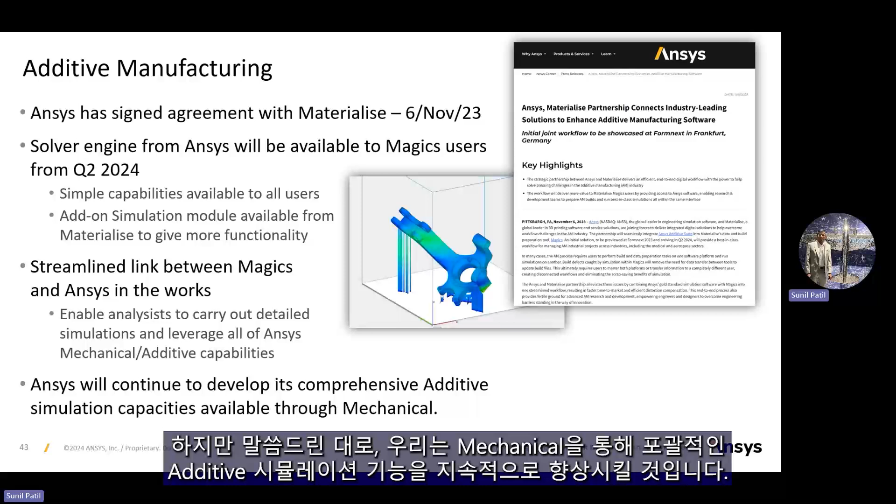As I mentioned, we have and will continue to further enhance our comprehensive additive simulation capabilities through mechanical.

Finally, I'll cover the sustainability topic. We understand the very challenging net zero targets for the gas turbine OEMs, and we are developing best practices for alternative fuels such as hydrogen, hydrogen blends, and ammonia. That has been a significant focus on our combustion modeling side.

We have been modifying some of our combustion modeling, introducing new models, making these models available on the GPU, but also more importantly, developing the best practices for modeling these hydrogen blends and ammonia to simulate complex phenomena such as flashback and lift off.

We have also published several papers through the Turbo Expo conference as well as the ASME journals, which cover these best practices. So if you have interest in learning more about these best practices, please reach out, and we are more than happy to work with you and share some additional details beyond what we've already published in the open literature.

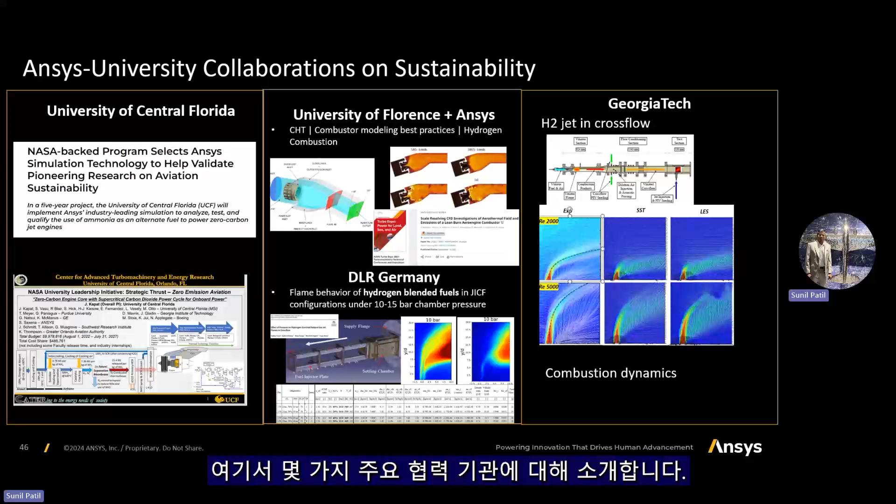I also wanted to mention that we have strong collaborations with several universities on the topic of sustainability, and I'm just highlighting a few key collaborations here.

We have strong collaborations with University of Central Florida on topics related to sustainable aviation and the energy transition. We have several years of continuous engagement with the University of Florence on various topics related to gas turbine combustion. Also collaborations with DLR Germany on hydrogen combustion. In North America, we have a strong collaboration with Georgia Tech, again with a lot more focus on hydrogen combustion, but also in general in the area of combustion dynamics.

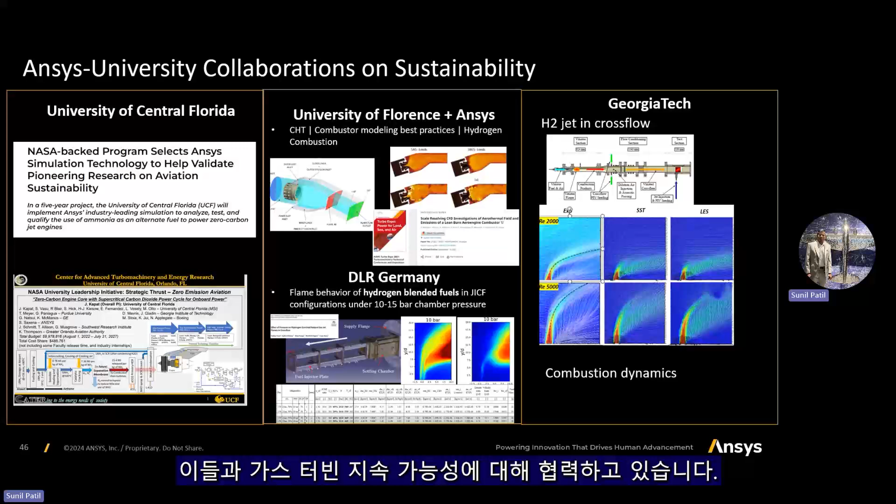There are also several other universities in the APAC region like KAIST and KAUST, with whom we are collaborating on the topic of sustainability linked to gas turbines.

Having the ability to have material properties as a function of the concentration of hydrogen, the temperature and pressure, and the damage, plus the ability to do the calibration of materials - we're providing all these different technologies to really look at hydrogen embrittlement as a much broader, comprehensive topic linked to sustainability.

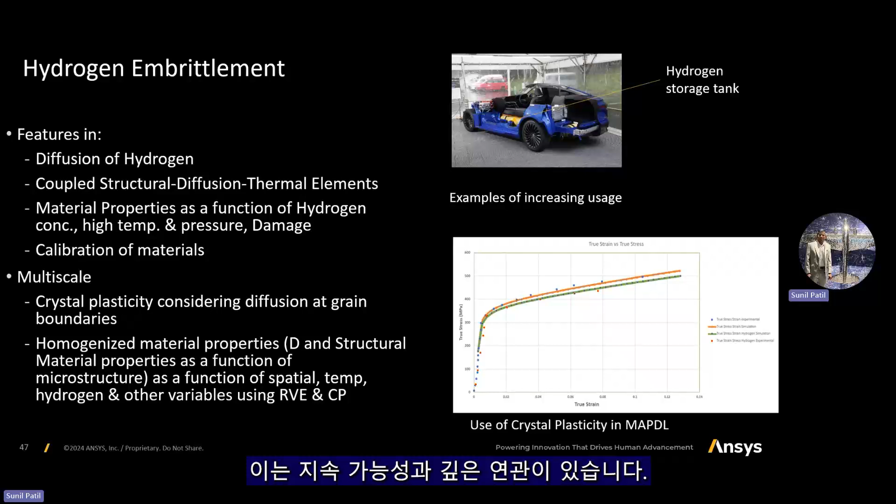Finally, I will wrap up here. I did talk about different technology pillars of our overall strategy and roadmap for gas turbines - key technologies such as GPU-based computations, AI/ML, core physics, and numerical methods for aerodynamical analysis. That has been a focus for us for many years, and we have been leveraging that to provide state-of-the-art solutions to our gas turbine OEMs.

As part of that, we have collaborations with all major gas turbine OEMs. I'm highlighting here some representative collaborations and some recent press releases - our collaboration with Pratt & Whitney in the area of digital transformation and sustainability, and our collaboration with Rolls-Royce to substantially reduce the design cycle time.

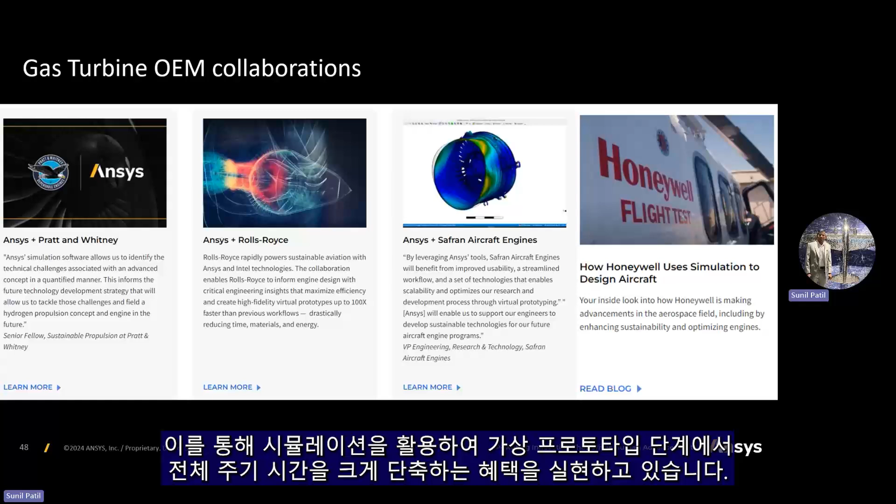Also collaborations on the materials side, with Safran Aircraft Engines, again to realize the benefits from simulations to substantially reduce the overall cycle time through virtual prototyping. And very recently, you would have noticed these videos and press releases about the collaboration between Ansys and Honeywell, which highlight how Honeywell uses simulation for aircraft engine design.

With these great stories of our collaboration, I would like to wrap up this talk on the Ansys gas turbine roadmap. If you have any questions or would like to follow up on a specific topic, please reach out to us. Thank you.